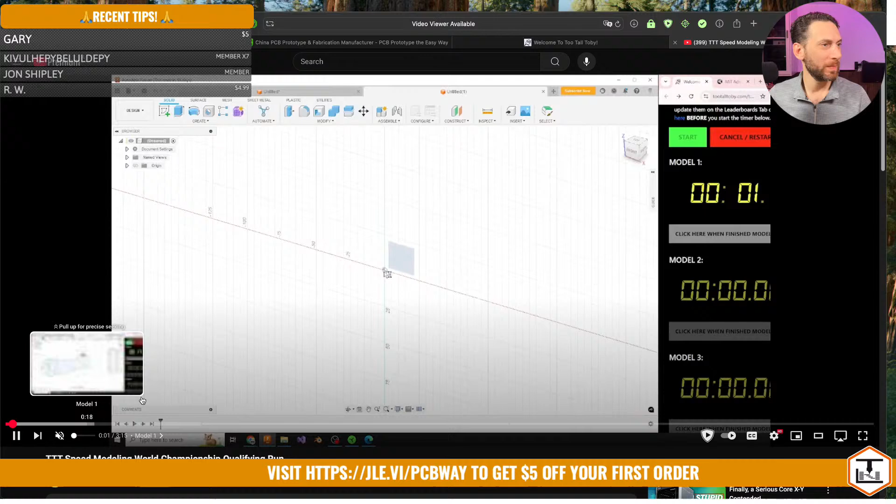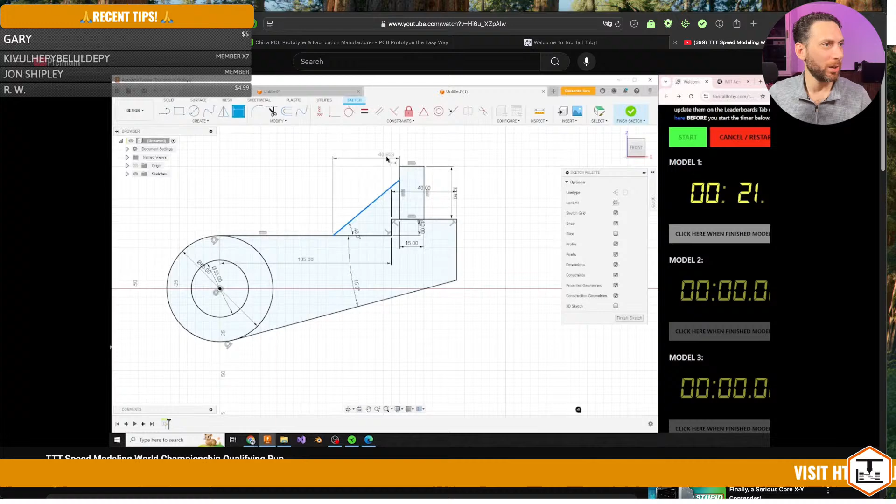We challenged these users to go through and model 3 parts. The times shown there, like the total time for this first user, Great Nate 808, he's a Fusion 360 user. He modeled these 3 parts in just over 3 minutes, so a minute per part. These are pretty complicated mechanical engineering style parts, and he was able to do this using Fusion.

In Fusion, you can create multiple contours. What we're showing here is that he's creating multiple nested contours, and then he's able to select each of those contours individually—that one he used for a revolve, that one he used for an extrude, that one he used for an extrude to a different depth.

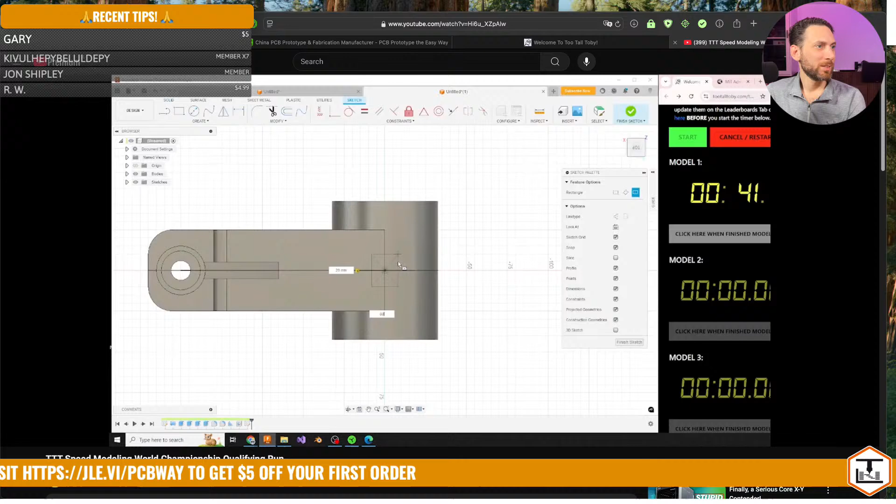This is all in real time—you can see the clock over on the right, that's our clock. He's able to model this part, and it's accurate; these are the dimensions that were on that 2D drawing. There he used a hole tool, and now he's adding that slot up in the front so you could put the inserted component going through the middle, the hinging component going through the middle. Boom, he's done with that part. Now he's moving on to the next part.

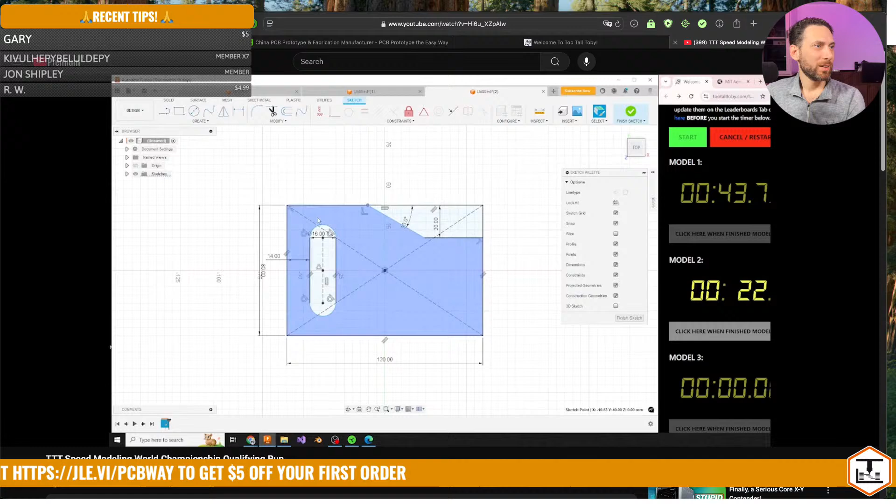For each of these parts, there's a split second where he has to show the mass so that anybody watching these videos can confirm he did it right, that he did it the right way. It's remarkable how fast he is.

I'll watch speed running on anything—I'll even watch somebody speed running a cake. I think it's so interesting to watch how people speed run and how they come up with these techniques. There are actually exploits that you could get into.

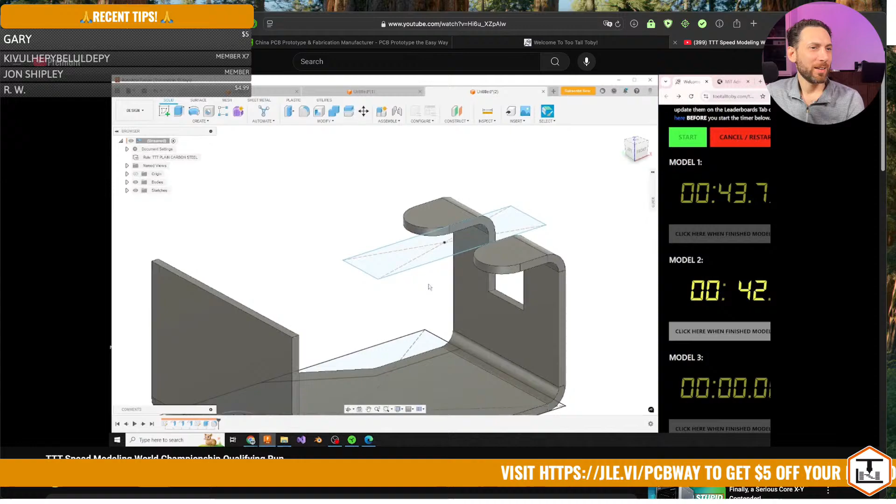Some CAD systems will remember what the previously input value was in a text box. So some of the exploits people will run are like making one feature with a rib, but a different feature with a thin extrude, because they know the CAD system will remember their previously entered values for those features.

Great Nate was a high school student, and he was number 1 to qualify into the tournament, but he didn't win the tournament.

That's the other cool thing—it's one thing to speed run on your own, doing it over and over again, but in the tournament it's a different set of skills. You see the drawing for the very first time, and just like that coffee mug example from earlier, you have to think through how you're going to build this part. Before you even start in CAD, you have to decide where the origin is going to be, what your first sketch is going to look like, and how that will affect later parts of the model. Should I center the origin so I can mirror, or should I put the origin in the upper left corner because all the dimensions are coming from there?

All these questions happen, and in the tournament it's amazing how quickly they go from seeing the drawing—I'm live streaming the drawing to them—to modeling. Usually what they do is take a screen capture and put it over on their second monitor, and then boom, they're right into the CAD and modeling.

I'm interested to hear if your takeaway is the same as mine.

What I have seen from all the content you've created that I've watched is one of the major advantages is how can you eliminate waste, right? Like, can I draw this line at this angle rather than defining these two? Can I define one thing that's going to then define three other things? Or can I do one sketch instead of having to draw and get it all done at once, so I don't have to click sketch, add a new sketch, name the new sketch. It's like how much can you cut the fat so that you do minimal construction lines, minimal waste, just the absolute essentials.

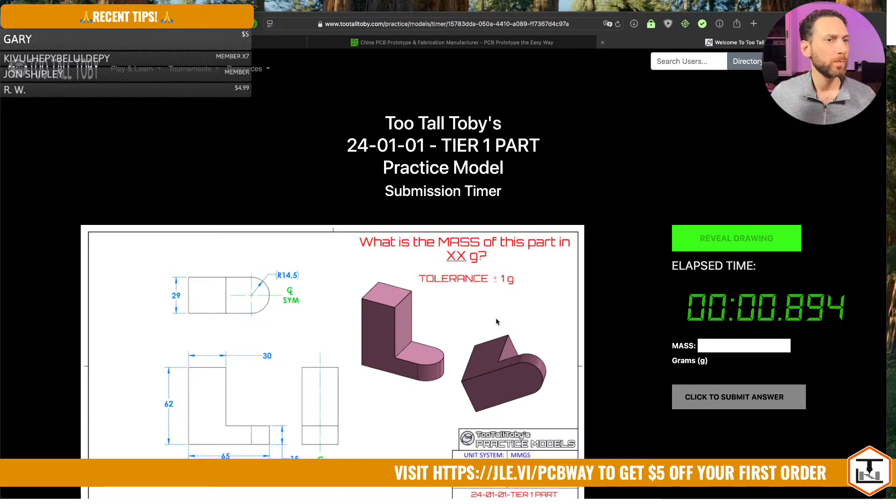Would you mind bringing up that practice model again, just real quick—that very first one, the tier 1 model? Let's pull it up. So you'll see that with that tier 1 model, when you go into it and go to the input for the answer, you say reveal drawing, and it says, what is the mass of this part, in XX grams?

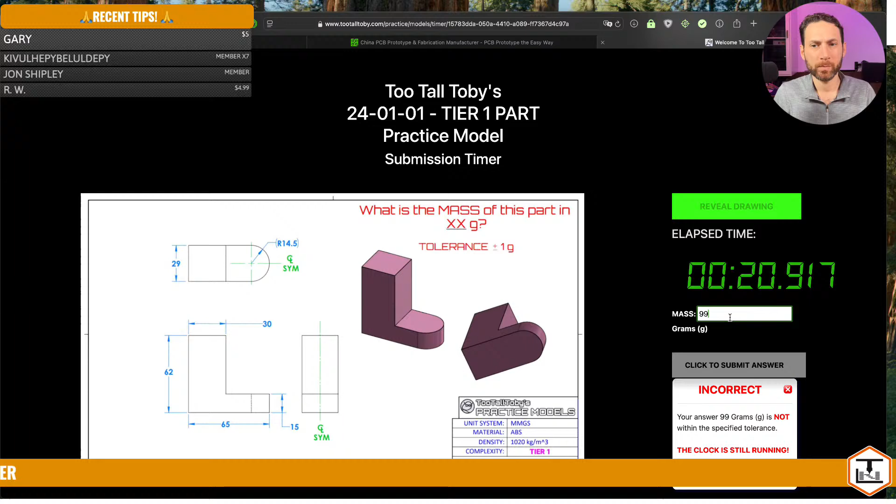Let's say you type in 99 and press enter—then it says this is incorrect and the clock is still running. You have to try again. What if we tried 69 for this one? It's always a good guess—if you don't know the answer, try 69, see what happens. What does it say? It says congratulations, I solved it in 29 seconds. Wow, that's like a speed running record. Right, incorrect if the mass is wrong, correct if the mass is right.

However, if you click the X on that purple screen—if you didn't submit yet—you can see on that drawing that if, instead of drawing it as an L shape, you just drew it as a big long flat rectangle and filleted off the end, you'd have the same amount of volume, and therefore the same mass. So you'd be able to get this one correct even if you created the geometry incorrectly.

And in the community, we refer to that as the Ivan exploit, because we're only asking for mass.

There's actually quite a few ways that an Ivan exploit can come up. Like if you have the same radius on a fillet that's concave and a fillet that's convex, one fillet is kind of canceling out the other. So you could just say, I'm not going to add that fillet. Save some time. Ivan exploit.

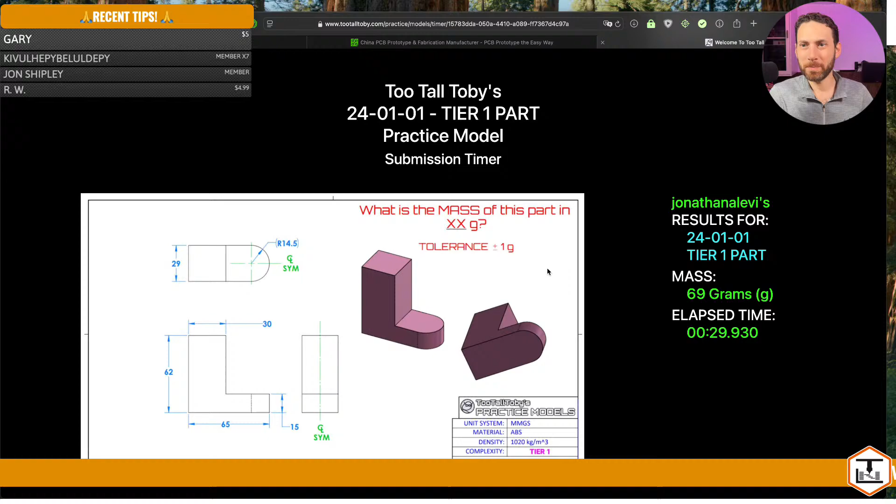There are several challenges in there, and there are filters at the top of the app where you can go through and say, I want to filter for multi-body. I only want to do multi-body, which is basically like doing an assembly. But something I'm very excited about is that just over the past couple of weeks, we've started adding challenges like this one.

So what I'm holding up here on the screen, for those of you listening, is a 3D printed soap dish. You put your bar of soap on this top platform, and there's a little fluid drain here on the front. And this is now a challenge.

It's a 2-part challenge on the website. If you go to the website and scroll down to the newest challenge, it's at the very bottom. This one's totally free for everyone—some of them are behind a paywall, some are free for everybody, but this one's free for everybody. What you're able to do is create all the geometry for this shelf. This is the first one.

So what do you think, Jonathan? What types of features would you use for something like this? I mean, I would probably do that whole thing in a sketch using the linear pattern. I wouldn't use fillet or anything like that, and I'd do the radius inside the sketch. Boom—one sketch, one feature, extrude it, and you're done. Perfect answer. And that would definitely work, and would definitely get you the correct mass.